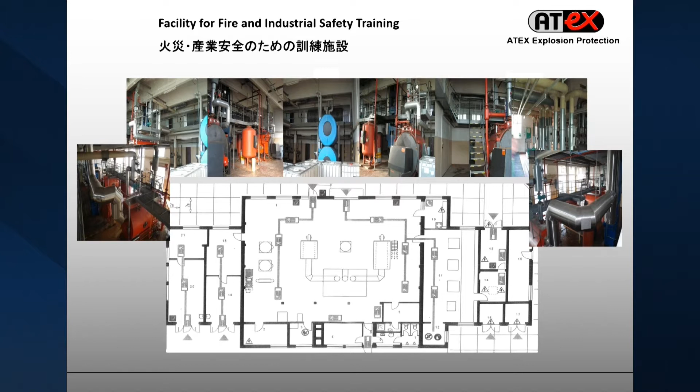If you look inside, it looks like an industrial facility, which is very nice because people, when they come from companies, they feel at home. They have similar equipment in their factories, and we made it into a house where we can do fire. And we can make hell in this, and firefighters are continuously training on our site, and we have practical explosion protection seminars where people come from all over Europe mostly, but also from the US, to study and see what explosions can do. And you wouldn't believe how policemen like to throw Molotov cocktails at each other and train how they should behave when things like that are thrown against them. And so this is just a short introduction to what we do at our test site.

And then I come to what we are going to talk about today, and that is to look into explosions, to look into data, what we need to know about explosions, and see how we can control explosions. And as I said in the beginning, the first step to really improve safety in factories is to try to keep it clean, because otherwise you have the risk of secondary explosions, which can be very devastating.

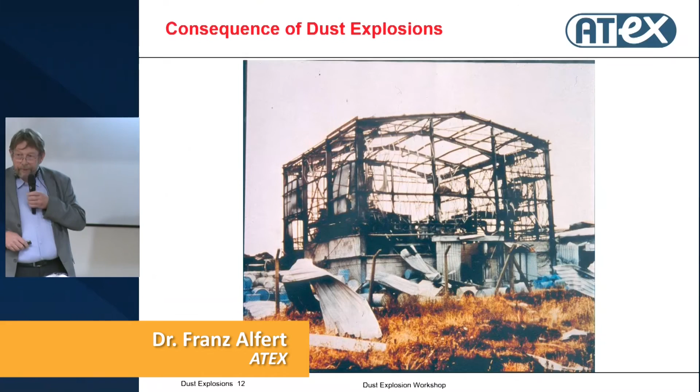Okay, so here just a few pictures of facilities that we have investigated when an explosion happened. And due to my work on European level, I was the chairman of the European Standardization Group for Explosion Venting. I also was invited to take part in different NFPA committees, NFPA 68, 69, 654, amongst others.

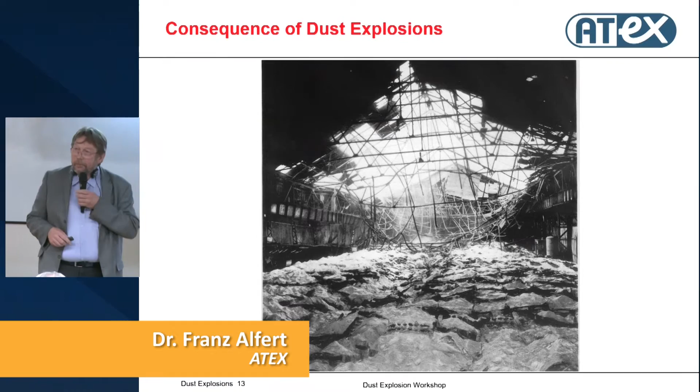And then you always come to situations like this where you see a whole building blown away. We are always happy when we hear that in an explosion, as for example this one in the UK, nobody was hurt or killed because it happened during lunchtime. People were at lunch. Now, of course, we can ask ourselves, would it have happened if people had been there?

The problem is nowadays, and I assume this is similar also here in Argentina, that fewer and fewer people are in the factories. We have a lot of automation, and then, for example, we do not hear anymore that suddenly a mill is making a noise that shouldn't be there, that something seems to be loose, and so on. And therefore, in future, much more we need to have control systems that automatically control and do the right action so that we avoid that something can happen.

Here you see a milling factory where, yes, the whole area of the mill blew away, but then also the house in front of it with the offices and everything went into fire. And this always tells us that there's always something that can be done, that can be improved. And we will, during this presentation, also hear how important it is to isolate. And that is something that is forgotten so often.

People do explosion venting because NFPA 68 tells them, here you have to use vents on this and this volume, and we make vent design. And what we forget is that all the guidelines that we have, all the standards that we have, are based on single volume protection. So that means if we do a vent design, then this is for the volume that we design it for. But it is not going to work if the explosion travels into the vessel, if it comes from somewhere else.

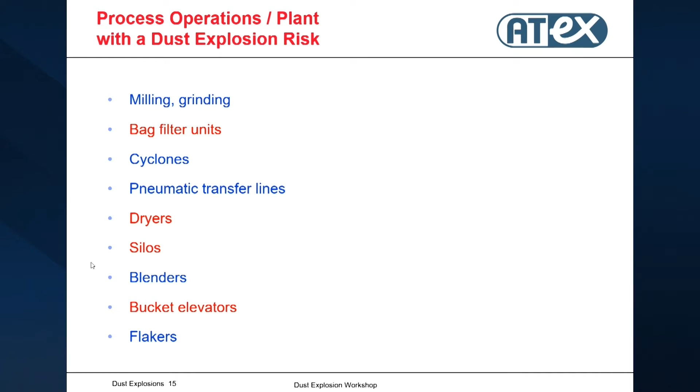Unfortunately, our highest rate of explosions we have in bucket elevators in Germany. And as a rule, our elevators are quite small. So therefore, it is not true that only huge bucket elevators can cause a problem. It's also the small ones that can cause a problem.

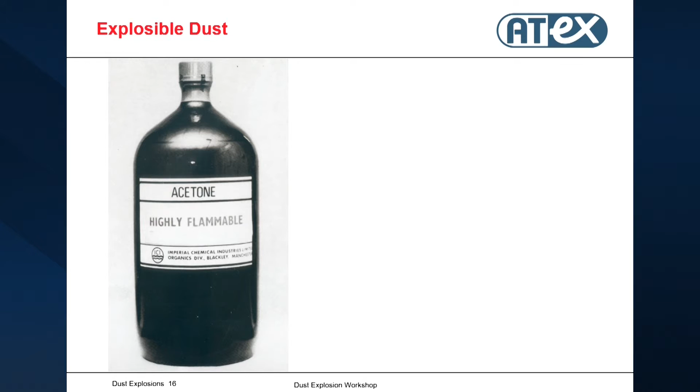Everybody accepts that if we have a flammable liquid like acetone, we have an explosion risk. But not everybody thinks that flour, sugar, grain dust is as explosible. And actually in the chemical industry with liquids like this, we nowadays very rarely have explosions. We have the explosions in the food and feed industry. And that is something we have to do something about.

And so that means flour can make stronger explosions than flammable liquids. And this type of dust, not only flour, all organic dusts, they are handled in much bigger areas where many vessels are connected to each other.

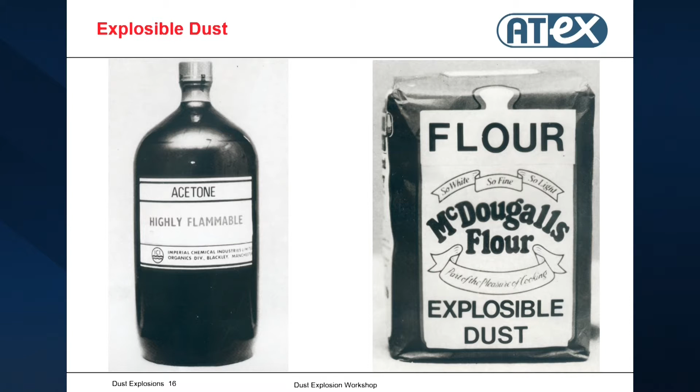And also, if you handle gas or flammable liquids, very often your explosion risk is only outside of the equipment when you get a leakage or something like that. With dust, typically you have the explosion risk in the equipment. And therefore, we really need to go and look a little bit closer into this, how we can work.

And most of you probably already have seen this triangle, which shows what we need to have an explosion. And that is, we need fuel, every organic material that can burn. If it is fine enough, it can explode.

We need oxygen, air, and we need an ignition source. And then it depends on how things get mixed, whether we get a fire. So if we have a combustion of a fuel which is mixed with air by diffusion, then we get a fire. If we premix it and make a dust cloud, then we get an explosion. And that can be seen as an example.

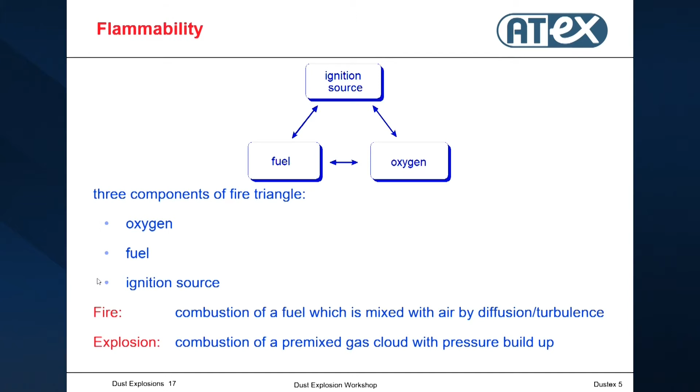Okay. Here, so if we have a gas burner, then we know the flame burns on top of the gas burner, and the fuel comes from underneath, and by diffusion we get air to it and we get our flame. That's a fire. If we go and premix the same material, whether it is gas or dust, and we mix it and have it in a dust cloud, then we get an explosion.

And I say initial pressure, so that means if you have an elevated pressure instead of ambient, no overpressure, or if you have 1 bar overpressure and ignite it, then you get the double here. That also is sometimes forgotten, and I will come back to that when I talk about explosion isolation.

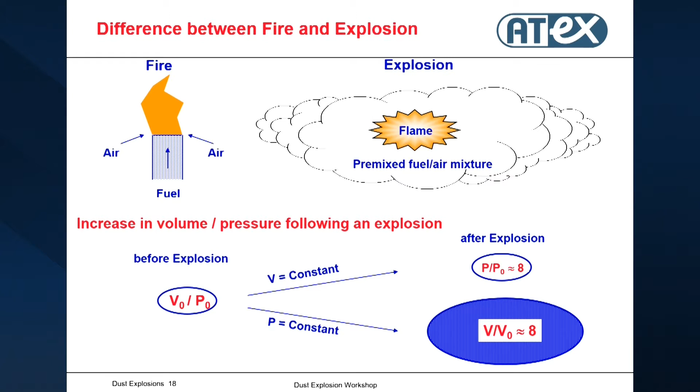If you let this cloud and you ignite it and you let it expand, then you have about 8 times the volume. Very important when you do one of the protection methods, explosion venting, because if you vent it to the outside, you get huge flames to the outside, which could make an additional risk to people, to buildings, to cause secondary explosions. So therefore, we have to also look into that, how we can go and handle this.

Now, I do not want to go too much in theory here, but this is why we have explosions. We have 2 components. I mentioned them before. We have fuel and we have oxygen. And they are at, say, an elevated level of energy. And if you add a little bit of energy, then they go over the top and they start reacting with each other. And then they fall down to a less energetic product. And the energy that is being freed, that is what is causing our problems, because that is typically for organic dusts between 1300 and 1600 degrees C, and that makes the pressure in our systems.

I always try to explain it and then help people remember it. I talk about here two young people, a young woman and a young guy. They are quite energetic, sporty, and you need to add a little bit of energy to it so that they become excited enough that they go and match together. So that means it could be some dancing, it could be drinking or whatever. And when they come to this point, then they match together and they eventually fall into a much less energetic status. And that is what makes an explosion, and that is the energy that we have to handle to control explosions.

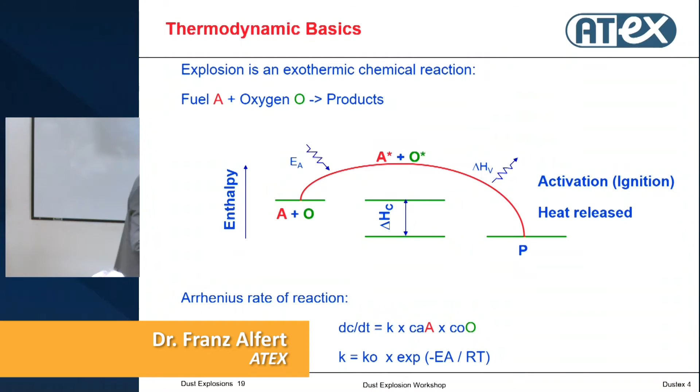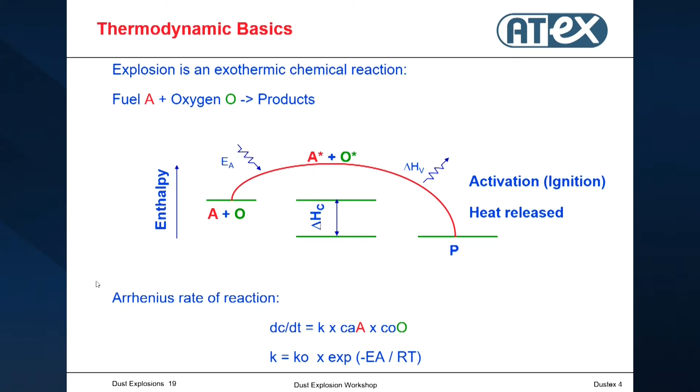Well, sometimes it won't work. Okay.

So to describe then the effects of an explosion, we have to first define under what conditions this material will support combustion. We have to have a certain concentration. Do you know how high the concentration has to be to have a dust explosion? Typically we say between 30 and 60 grams of product per cubic meter. Now, how much is that? If you have a light bulb at about 2 meters distance and you cannot see this light when it is turned on, then you have the concentration that will support an explosion.

Sometimes I'm getting asked about dust in the air against the window or against the light. Of course, that is not good enough. The concentration is not high enough. And then, of course, we have to look at the ignition sensitivity. That means how much energy we have to add so that the material starts burning or starts exploding. And then the most important thing afterwards is that we have to go and see the rate and type of flame spread, and especially the pressure development and how fast it developed during the explosion.

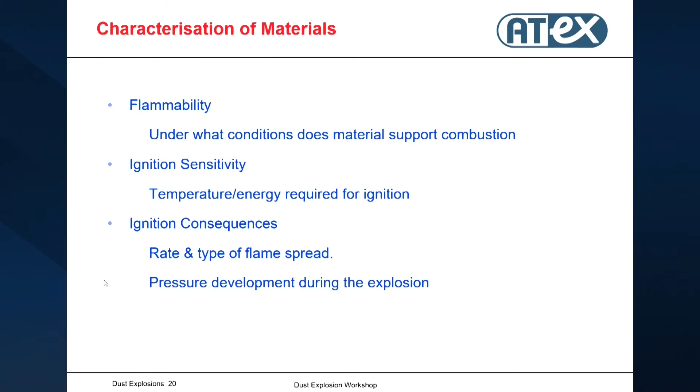Oh, I think something. Okay. So that means for explosion protection, there's many other things, but what we need for explosion protection is flammability, ignition sensitivity, and then the explosion violence. That means the rate of rise and the maximum explosion pressure that we get in order to describe what we can do.

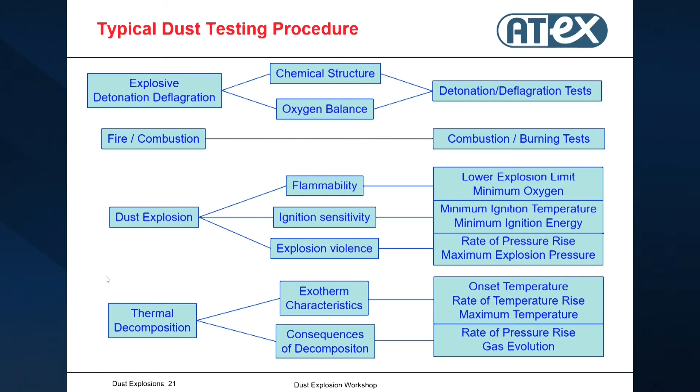So something is happening with this one. Battery empty? I don't know. Yeah. Now it goes. Oh, maybe I pushed it too long.

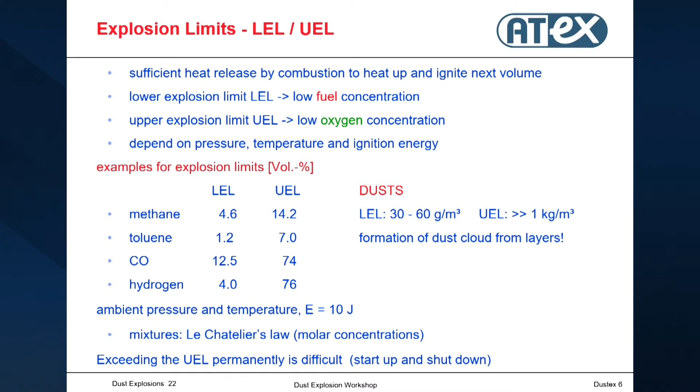Okay. Here, I do not want to go too much into detail, but what you see on the right-hand side is that for dust, typically the lower explosive limit, the minimum concentration that you need, is between 30 and 60 grams per cubic meter for all dusts, more or less. The upper explosive limit is much higher, and therefore this is typically not used in industry, because when you have a very high concentration, you could have dust settlement, and then you go into the explosive region. In certain gas situations, you can also use the upper limit so that you cannot have an explosion, but for dust we are not using that.

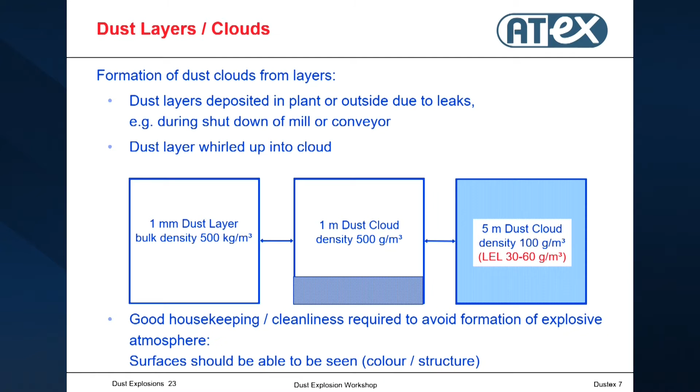Okay, I said you need 30 to 60 grams per cubic meter. Now what people very often do not realize is how much that is. If you have a product, and that is typical of organic products, with a bulk density of 500 kilos per cubic meter, and you have only a 1 millimeter dust layer on the floor, on the tables and so on, that is not much, it's very little. But with 1 millimeter, you have 500 grams per square meter. If you disperse this dust 1 meter high, then you have 500 grams per cubic meter. That is typically the most dangerous and easiest to ignite dust concentration.

So when you have a 1 millimeter dust layer on the ground in your factory, and for some reason you disperse it, then you have a very easy to ignite dust cloud. If you go the next step and disperse it to fill this room, which is about 4 meters high, if you disperse it 5 meters high, you still have 100 grams per cubic meter. That means you would still be in the explosive concentration. And that is why, as I said in the beginning, the most important thing is to clean the factory outside of the equipment to make sure that you do not get secondary explosions.

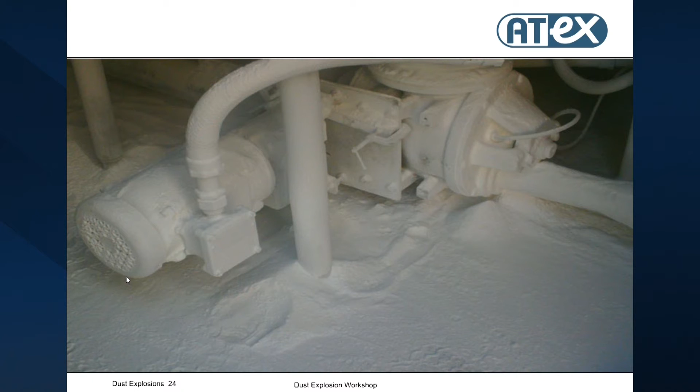This, of course, is not acceptable. That's ridiculous. If you see something like that in a factory, with electrical engines in between and dust like that, then you should go a little bit away from that.

Okay, the way we measure minimum ignition energy, because that is what we know, and we will also be talking a little bit about how easily dust clouds are ignited and what electrostatics does, because many people talk about electrostatics without really having a feeling for what it is. I cannot go too deep into that, but I will spend a few words on it. And what you can see here is that certain

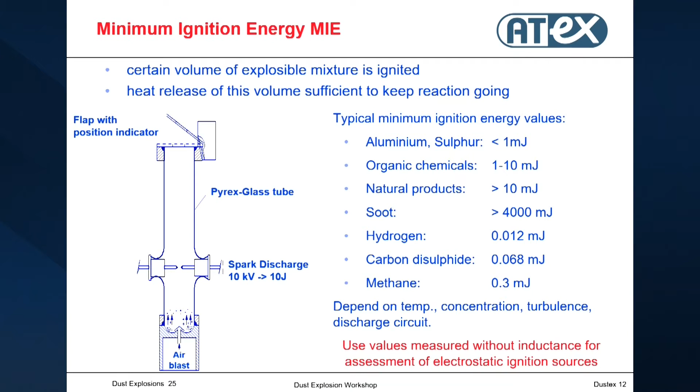dusts are quite easy to ignite, smaller than 1 millijoule for fine aluminum dust and sulfur. Organic chemicals are typically between 1 and 10 millijoules, and the most often handled products here, natural products, are above 10 millijoules. Depending on the moisture content, it can be much higher. And that is, I will come back to that, very important also for electrostatics: what we need to do and what we don't need to do.

Here you see the test from our laboratory where we do this measurement for minimum ignition energy. For normal natural organic dusts, we know it's somewhere in the range between 10 and 100 millijoules or even above, depending on the moisture content. If you use aluminum dust, as we have done here on the right-hand side, then it can become quite strong, and even the electrodes just shoot out and disappear, because with very little energy you make

a very strong explosion. The reason why metal dust explosions are much more serious than organic dust explosions is because metal dust burns at temperatures of about 3,500 degrees. Organic dust, something like 1,500 degrees, so less than half of it. And that also makes a difference in violence, in pressure, and things like that that we have to handle.

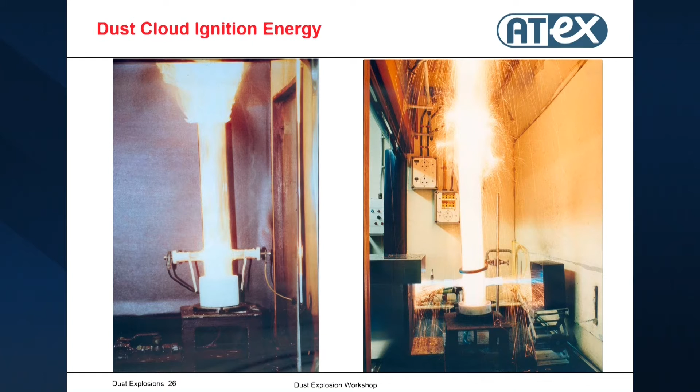Ignition temperature is another thing. So on one hand we have the minimum ignition energy. On the other side, we have the temperature at which things can ignite. That can be hot surfaces and things like that. It could also be self-heating. We have that with organic products, for example grain: if they are too wet and get into a big storage, then first you get a biological process, and afterwards it can turn into a self-heating process and you get a fire in the silo.

And farmers, at least in Europe, all know if you mow grass and put it too wet into your storage, then you take a big risk that you get a fire afterwards. And that we also have had in some silo storages where you have problems like that.

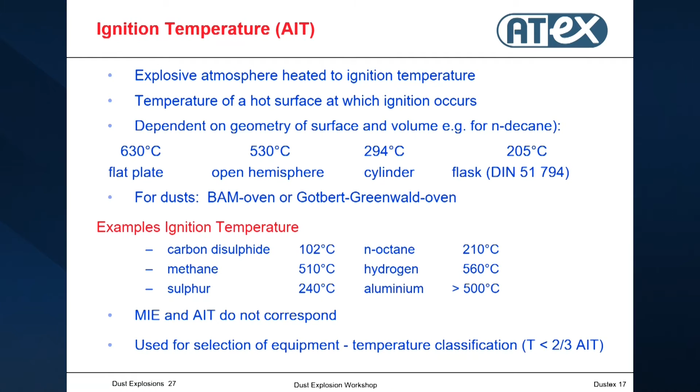Also, and that is something that a company did in Norway, you add some oil to it, different things that fit the product, in order to reduce dusting. And they were very successful. They could take several filters out because they didn't have dust anymore. They had a very, very fine spray of soy oil onto the product, and then they didn't have dust anymore. What it caused was that the self-heating temperature went down quite a bit, and so they got self-heating problems in their filters, and that is not really what they wanted.

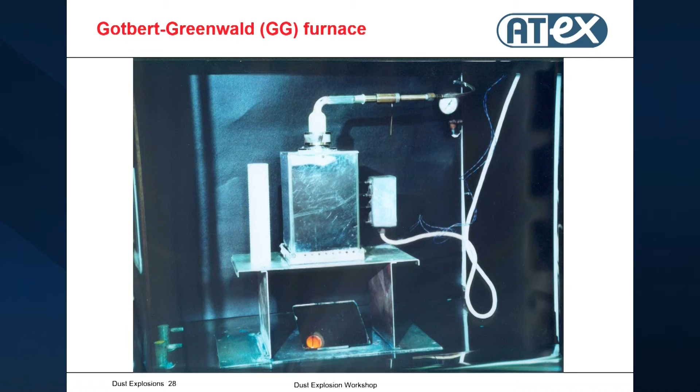So there are different ignition temperatures that we look at. It could be the ignition temperature measured in the so-called Gotbert-Greenwald oven, where the dust cloud just falls through an outside heated pipe. There we get one type of temperature, but when we go into a warm storage oven, then we get much, much lower temperatures. But I will come back to that.

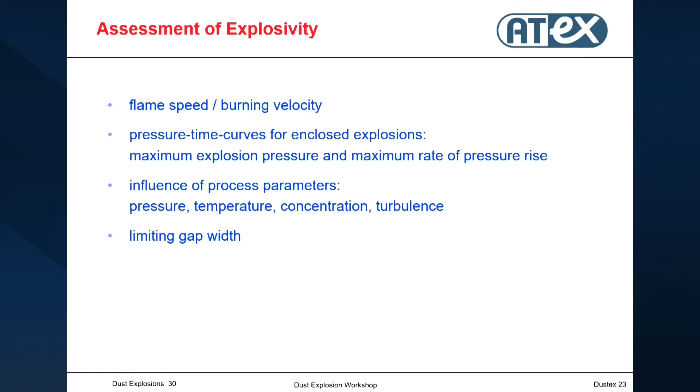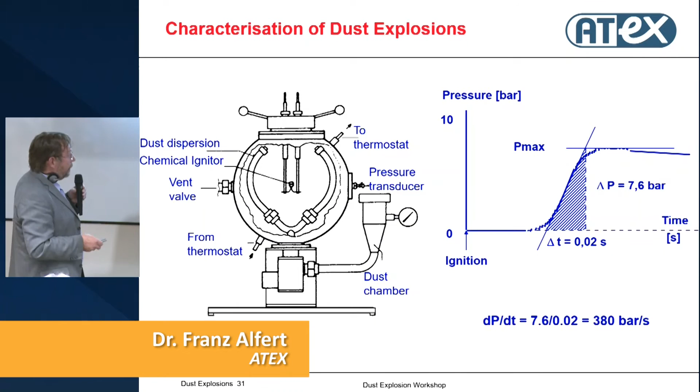And then the next thing, of course, is the flame speed, the burning velocity, or the pressure curves that are generated when we ignite it, because that we need to design the right protection method. This is typically measured in a 20-liter sphere, or the ISO standard is a 1 cubic meter vessel, but the 20-liter test vessel gives the same result with respect to the maximum explosion pressure that we have to handle. You see the maximum explosion pressure, and also the rate of rise.

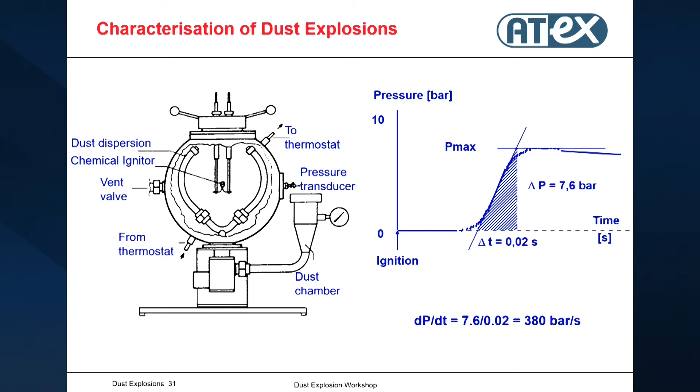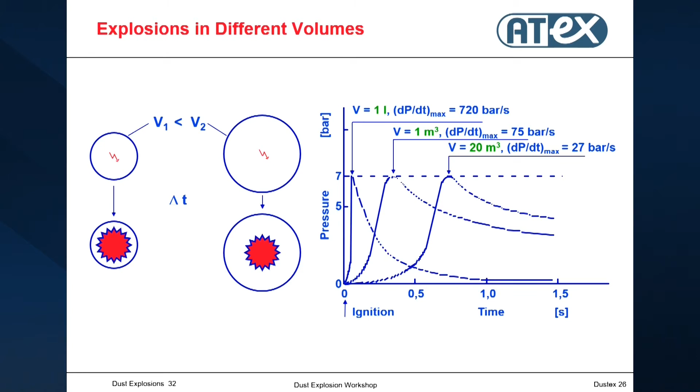And if you have a 5,000 cubic meter vessel, it becomes easier and easier to handle the explosion inside the vessel, because it takes a much longer time until you get the maximum pressure, and that is what we use for explosion venting and explosion suppression.

Okay, and you may have heard already about that. We have 3 different categories for how we normally categorize dusts, the so-called ST1, ST2, or ST3 dusts with a certain rate of pressure rise, and that we can use for calculating the vent area. In Argentina, I think you mostly use NFPA standards, maybe also the European standards, but in most areas they are quite similar, because we work together with NFPA and try to match things together.

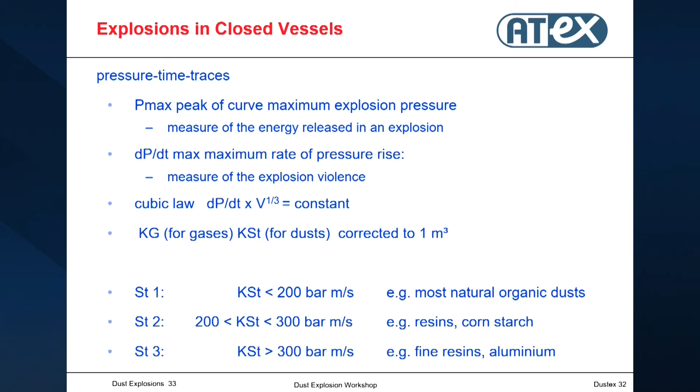Okay, so what one also has to consider, in certain situations, I just mentioned this shortly here: the process parameters can influence your data. That means, for example, the increase in process temperature will widen the area where the material is explosible. If we have an increase in pressure, it will increase the rate of pressure rise quite a bit, and that is something we use for explosion venting. So therefore, we have to obey. If you have a dryer or work at high temperatures, then you may have higher pressure rise in your system.

Turbulence, of course, and we come back to that. Turbulence is very important for explosions. So the higher the turbulence, the stronger the explosion. And that's especially important when we have explosion transmission from one vessel to the other.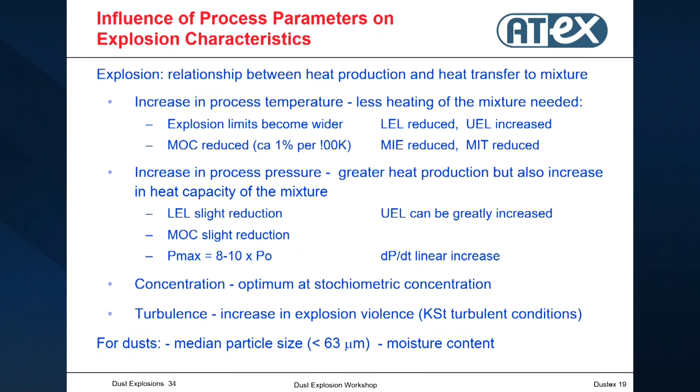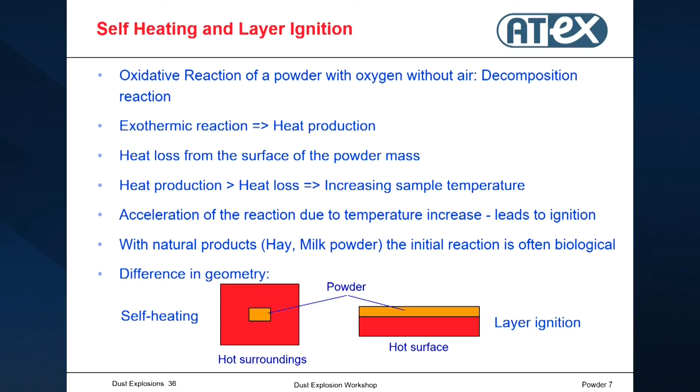I don't want to go too much into this self-ignition temperature and so on. Just have mentioned, if you have a temperature measured on a hot surface, that temperature is much higher than to have it in a hot surrounding. That means in a dryer or something like that. So with a hot surface, you lose your temperature to the top. And if you have your thing surrounded by heat in a dryer, then of course the ignition temperature goes down.

I just jump over this. This I already have mentioned here. The thermal stability or the self-ignition temperature goes quite a bit down if you mix only small amounts of oil to your product. Then it can much more easily ignite.

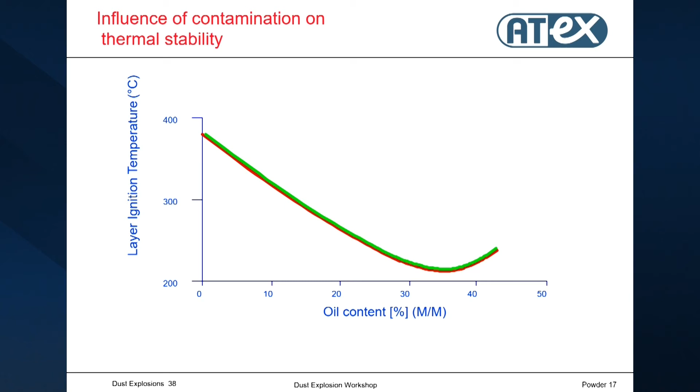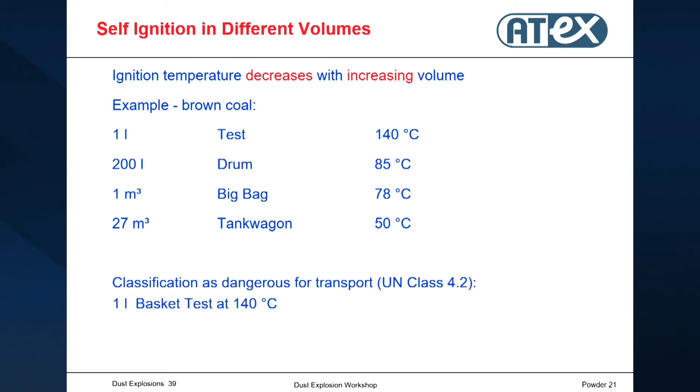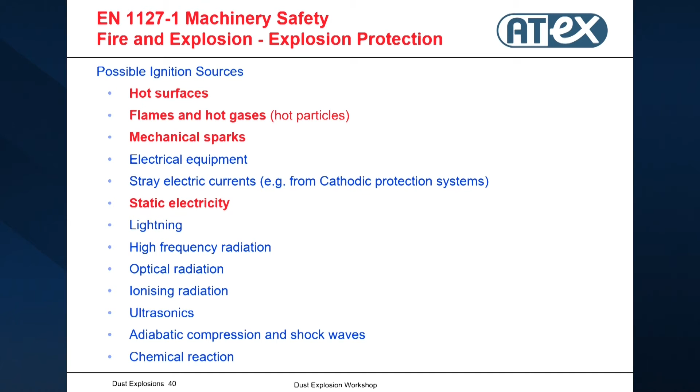In Europe, we look at possible ignition sources, and I would like to address a few here: hot surfaces, flames and hot gases, that means hot particles, mechanical sparks, and static electricity. Everybody really knows something about the first 3. It's obvious. If we have a hot surface and it is too hot, then it could make the powder brown or eventually go on fire. And flames and hot gases, of course, we accept that these can be an ignition source.

Mechanical sparks, there we especially have to look for thermite reactions. That means rusted steel together with aluminum, where we get very strong sparks that could cause an ignition. And then static electricity. And in the type of industry where you have elevators, chain transport, and things like that, there the relative velocity is important.

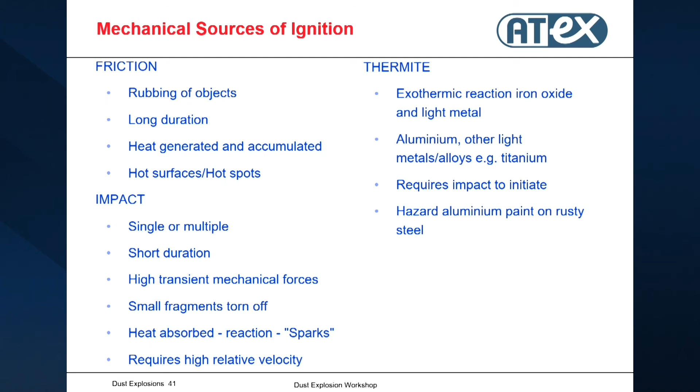And we typically say if you have a relative speed of metal that comes into contact of less than 1 meter per second, then typically we do not consider it an ignition source. If we have a relative speed of 1 to 10 meters per second, then for easy to ignite materials it could become an ignition source. For materials that are not so easy to ignite, it is not an ignition risk. But if we have transport or turning wheels that are faster than 10 meters per second, we have to consider it a very strong potential ignition source, and then we typically say you need explosion protection.

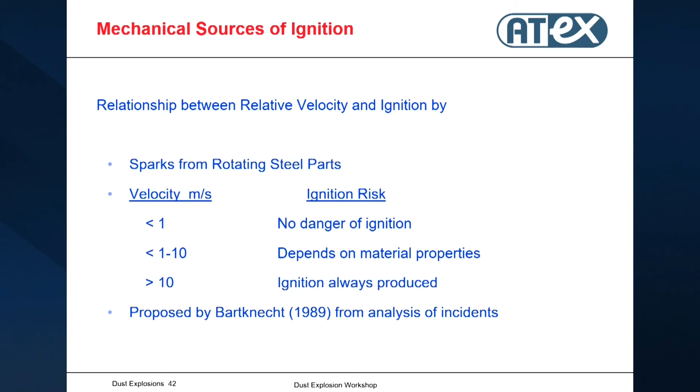But that is something an analysis has to show: what kind of ignition sources one has in the factory, what kind of dust concentration, and also how the dust is formed, and so on. And so here you see again: smaller relative velocity of rotating steel parts, smaller than 1 meter, no danger of ignition. 1 to 10 depends on the material properties, how easy to ignite, and larger than 10, one has to assume that it is a potential ignition source.

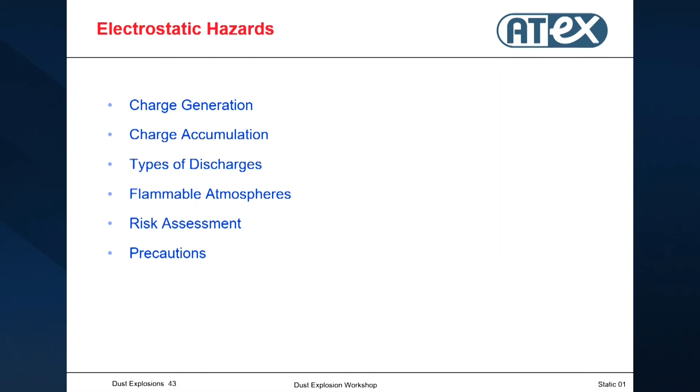Just a few words on electrostatic hazards. Sometimes we call it magic static, because everybody knows something about electrostatics, and also in Germany, we have many explosions where people do not really find out what the ignition source was, and then it's always the magic static. But I think by now we have quite a good feeling for what electrostatics does and how it can ignite the dust cloud.

So what we always have in electrostatics is that we have a charge separation that can be done by transporting things very fast, by blowing it, by having it fall down a long distance, where then things charge separate, and you can have a relaxation reaction where the different charges accumulated on the installations and on the product come together again and go to earth. Or you could have a spark discharge, which then eventually can ignite an explosive atmosphere.

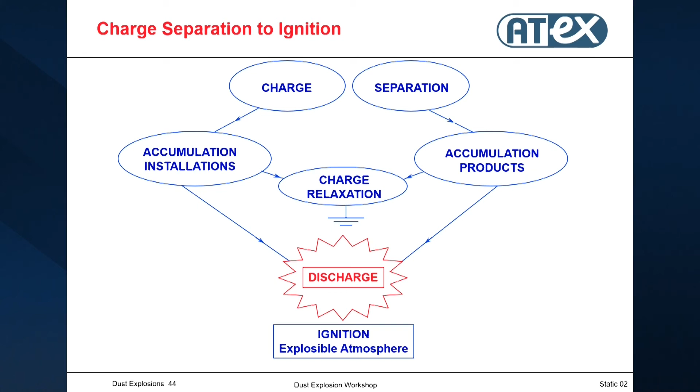But not all sparks are dangerous. So if we look at the different sparks, electrical sparks are always strong enough to ignite a dust cloud. So therefore, everything needs to be earthed. Otherwise, we have condensators that charge up, and eventually we get a spark discharge that will cause an ignition. So therefore, mechanical equipment needs to be earthed, always.

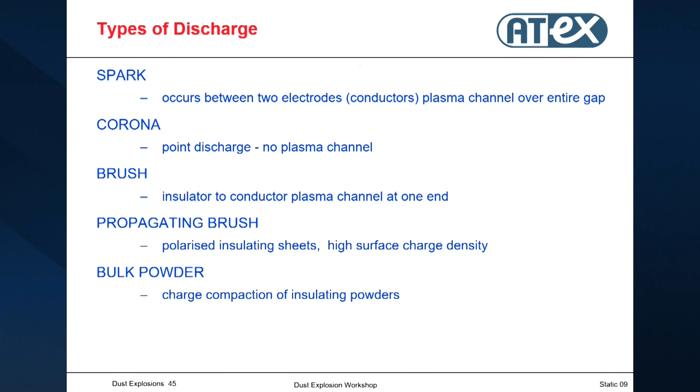Then we have the corona discharge and the brush discharge. Corona discharge cannot ignite anything, maybe very, very easy to ignite gases, no dust. Corona discharge is a discharge between a non-conducting object and a very fine pointed needle. Then only a small area of this charged object will discharge, and that is so little in energy it will not ignite anything.

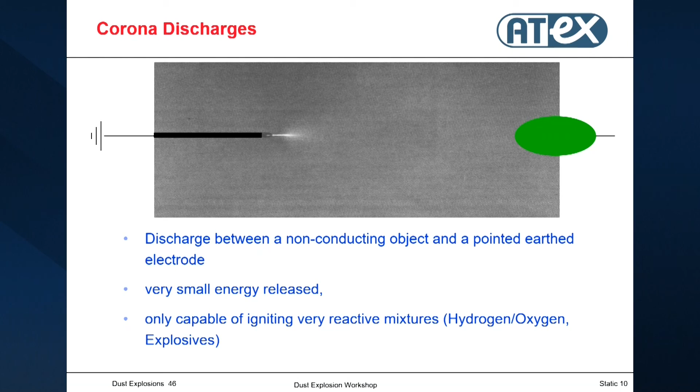The brush discharge is a discharge from a non-conducting surface, not to a very pointed earthed conductor, but more a round conductor. And we have some explosions that have been initiated by such a brush discharge. With brush discharge, the minimum ignition energy has to be something like 3-4 millijoules, very low. As I said before, in the food, feed industry and so on, we have minimum ignition energies quite a bit above this, and therefore brush discharge cannot ignite such clouds. And that is very important for this type of industry.

If you have filters, people tend to think, if we want to improve our safety, let's go from the normal filter bags to anti-static filter bags. Anti-static filter bags are conductive so that they can get rid of the charge. The problem is, if you have an anti-static filter bag and you lose earthing so that the filter bags cannot discharge to earth, then they become a potential ignition source, because then you have a condensator that is charged and that then can discharge.

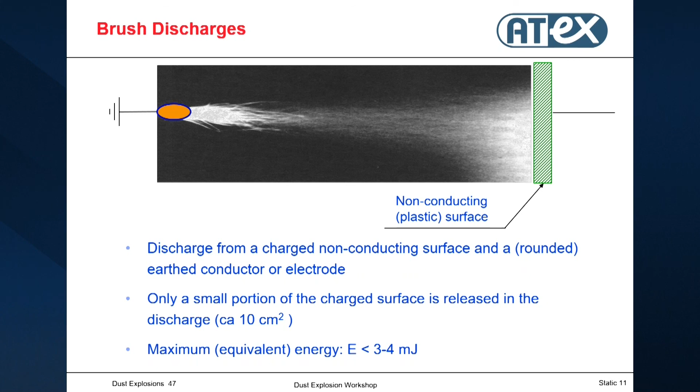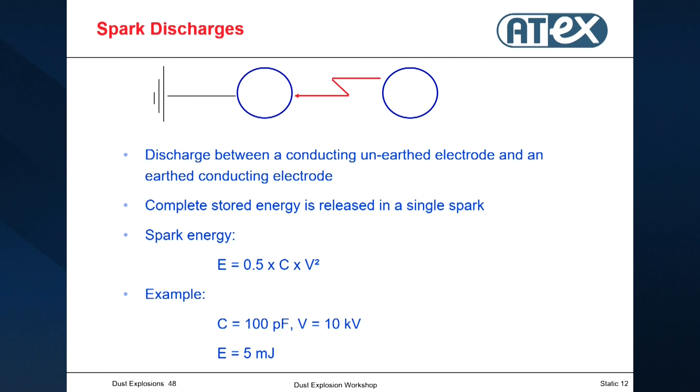One thing which is very important: if you have a non-conducting layer with a conducting background. You see that sometimes, you have a plastic pipe that you use for filling a truck or a train. This plastic pipe gets damaged, and I've seen people make some kind of metal sheet around it from the outside. Then you have this situation, where you could get a propagating brush discharge, and that ignites everything.

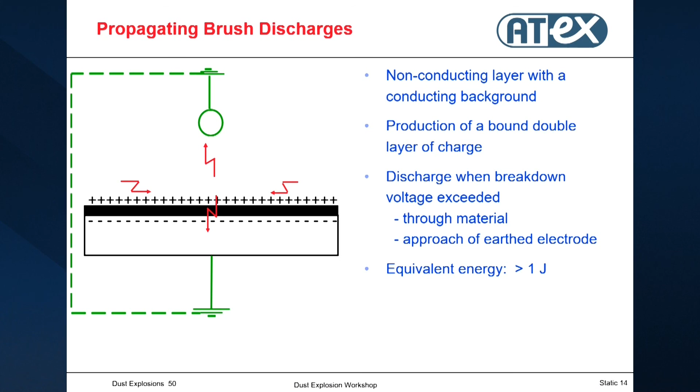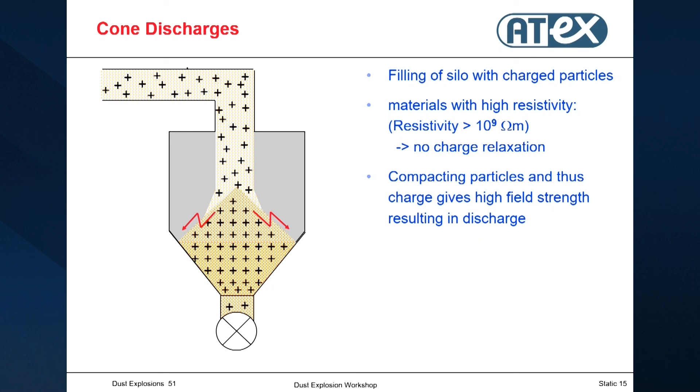Okay, and then we have the cone discharge that occurs only in certain very special situations, so I don't think we have to go into more detail here. For precautions, you find a list of what one can do against this, but I think the most important message is do not use anti-static bags if you do not need them.

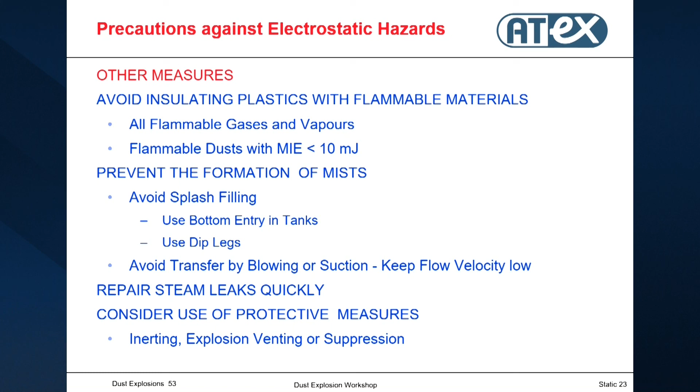Okay, I think we make a little break here. The first time is over, and afterwards we will go into the protection methods, and I will also show a few examples of certain industrial situations, what can be done, and also describe in a few videos what an explosion looks like and what we can do against that.